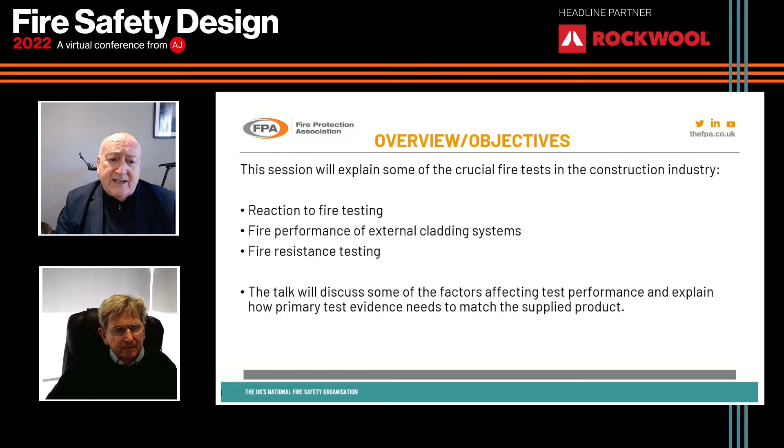Just harking back to the first presentation this morning from Colin from the HSE, as a way of introduction: he noted that the new gateway process shows that the designer should ensure compliance for fire safety and provide the supporting evidence. That's really, really challenging. John and I are going to show you why that's challenging, and perhaps some ways that you can help yourselves through that process.

So, jumping straight into reaction to fire testing, there are a couple of aspects to this. One is inside a building, and how we would classify the inside of a building, and then John will come on to the external cladding shortly.

It's a really technical subject. It's only small scale testing generally, probably no more than 2 meters high when we're looking at the inside of buildings. In this case, for reaction to fire, we're looking at the combustibility and ignitability of a single material. It interacts with the substrate that it's on.

The color of it can influence its performance, and many other factors can influence the performance. The way I look at reaction to fire testing within a building is a small waste paper basket in the corner of the room catching fire, and what happens to the linings of that building. We'll come back to that analogy later on.

But do the walls propagate the fire and spread it up and along their surfaces? Does the ceiling do the same? Does the floor do the same? There's a number of test methods used to get to a classification, and it's that classification which is used in Approved Document B, which you'd look at depending on where you use it in a building, and what type of building it is.

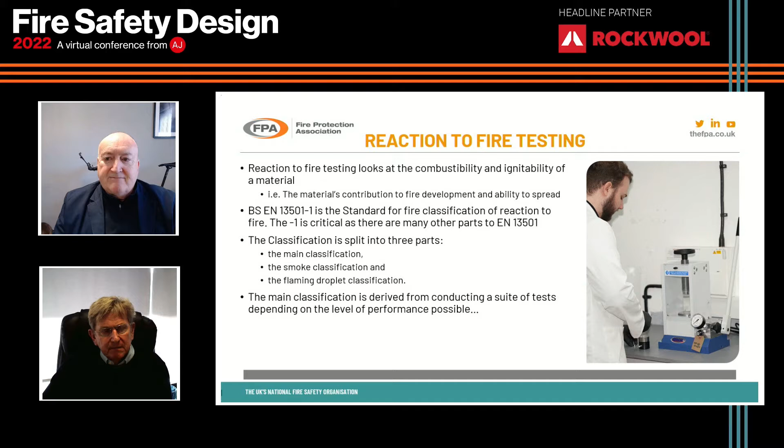I'm going to hand over to John in a second, who will take us through the outside of building, and obviously part of the reason we're all here today talking about fire safety was because we got it wrong in some of the recent exterior aspects of buildings.

John. Okay, and thanks for that, Chris, and thanks, Paul, for the introduction. As far as the fire performance of external cladding systems, what's the interest?

Well, quite clearly, the fire in June 2017 woke the world up to the fact that the fire performance of external cladding systems was important. For those of you who don't know, the Fire Protection Association's history is very much associated with the British insurance industry. They were our founders, and they still play a major part on our board.

In fact, immediately after the Grenfell fire, insurers asked us for our advice about where they should go with external cladding. Clearly, the view we all had immediately post-Grenfell was the systems had to comply with certain regulations, and so the expectation was that a large-scale test would have been performed, an 8414 test on that system, and the system would have passed to allow it to be put on that building.

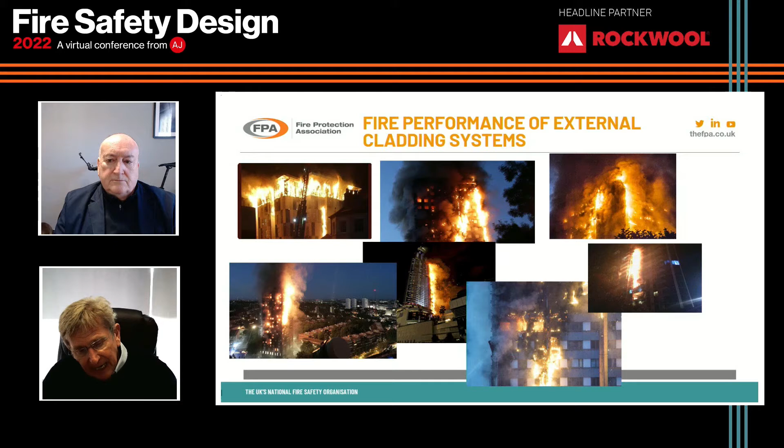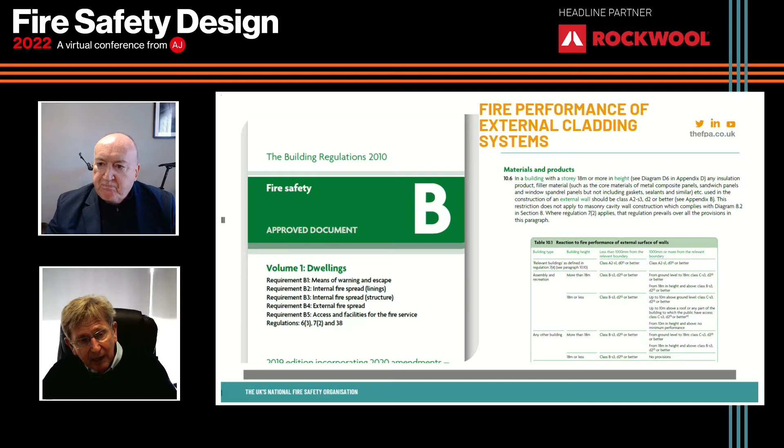For many years, many of you will be aware that the insurance industry has put its own rules and regulations in as far as sprinkler systems and other fire protection systems. It's not been quite so tough on the fire resistance requirements of buildings, because it's really looked for building regulations to do that. I think Grenfell highlighted another issue, and the insurance industry then began to look a lot more closely at external systems and see whether the current testing system was fit for purpose.

We knew that there would be a review of the 8414 system, and so FPA was actually commissioned by the ABI to look at the standard itself. We looked at several different aspects. We looked at the fuel loads, because in work that we'd done, particularly on curtain wall systems, we'd found that some of the fuel loads used in testing didn't really take account of a modern lifestyle.

There was an awful lot of plastic involved in the fuel load of modern buildings, whereas most of the cribs used for reaction to fire resistance testing are wood. Actually, when we did the two comparative tests with an open burn, including some plastic, and looked at the full wood crib, we found the full wood crib was a pretty good test for 8414. So we parked that and said, yeah, we think that's generally okay.

More worrying for us was the breaching of the cladding system by unstopped vents and ducts. Very early on in the Grenfell investigation, it became quite clear that toxicity issues were a problem for the residents caught in that tower block, and the 8414 test has no requirement there. Our work confirmed that needed more looking at.

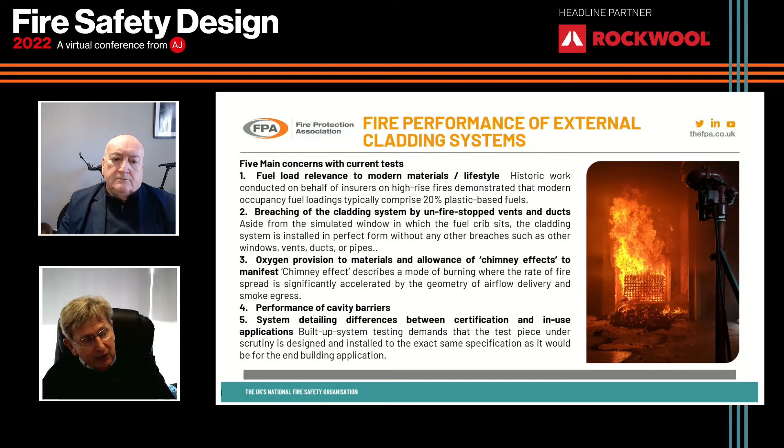We released that report, it went into BSI. There was a review of 8414, and some changes were made, but certainly not enough. And the important thing to stress here is that insurers are not convinced any longer that the 8414 test, even the modified 8414 test, is enough of an indicator to give them any satisfaction that there is the level of non-combustibility or fire resistance that they require in the external system.

So in the new year, we're likely to see an 8414 plus—I'm calling it 8414 plus, it will almost certainly have a different name—but it will be a stiffer test. And for those of you who remember FPA's origins being back at the FOC, you'll know that the loss prevention standards, insurance standards, have always been there to look at property protection as well as life safety.

I think what we'd like to see within that new standard is some open state cavity barrier test done before the 8414 test. We are likely to have fixed cavity barrier positioning. There's a material identification test, which we've actually now been doing at the FPA for about 6 or 7 months, so we can give a chemical fingerprint of all of the insulation materials used in the test sample, so we can give some reassurance to property owners and specifiers that the stuff we tested is the same stuff they're putting on the sides of buildings.

We're looking at the measurement of field of debris, because that's clearly important, particularly for firefighting and evacuation purposes. We're looking, as I said, at the introduction of penetrations such as extract ducts. And again, I touched on the measurement of toxicity. But most importantly, we're looking at the certification of manufacturers and installers.

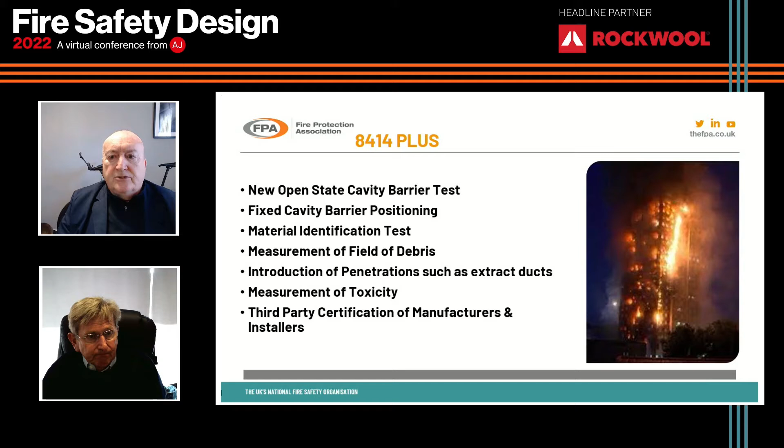Chris. Thanks, John. So I'll elaborate shortly on the testing versus certification aspect.

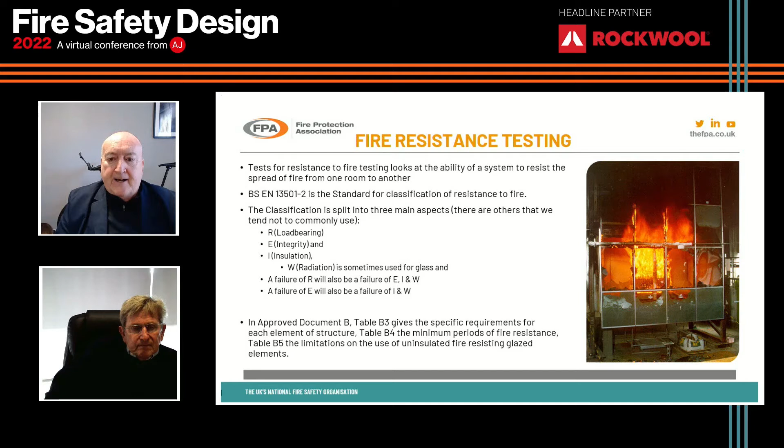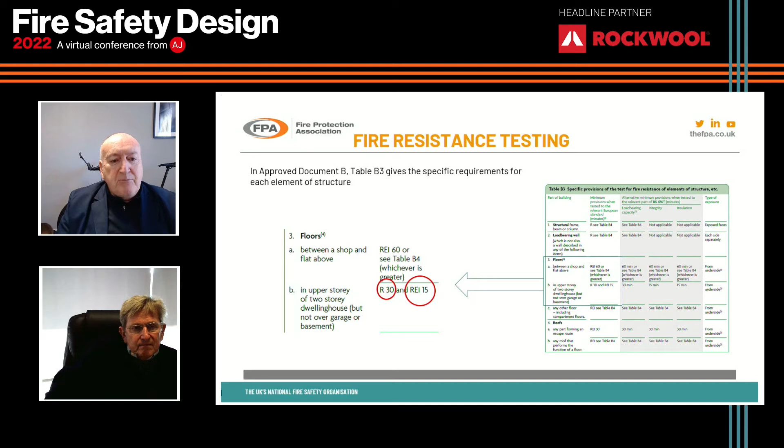It's on there, as you can see. I'm rattling through these, but taking a few specifics from Approved Document B, you'll see where it references those classes. Just one letter either way, omitting the R, omitting the E, can be significant and can give us a completely different type of product.

Similarly with that, I'll skip over the next one. I just wanted to touch on, because Paul mentioned it before about certification, there's a whole series of factors here which cause issues about the test data. When we get supplied test data, how do we know it's valid? Is it right that's relevant, the data that was tested 10 years ago for the product that's actually coming to site now, who's going to install it, etc.?

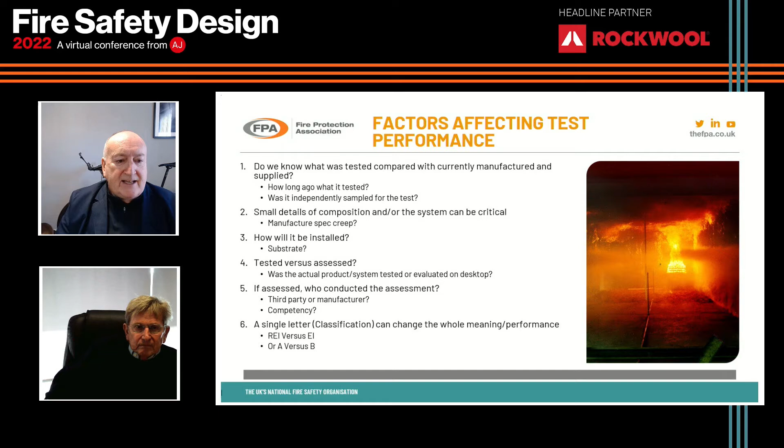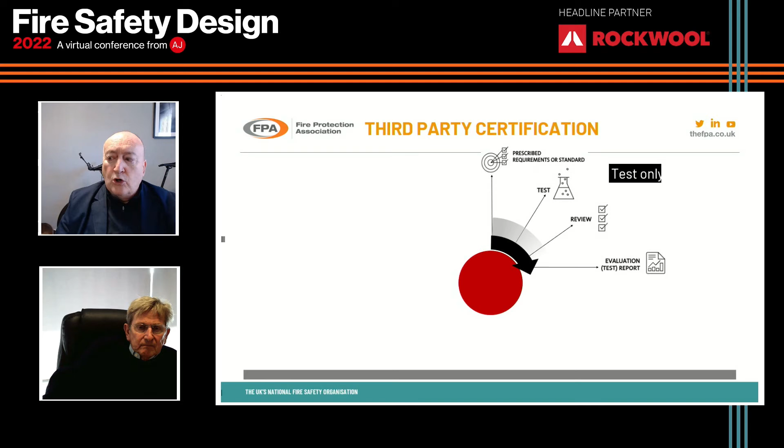Actually, the answer to that is in product or installer certification. Those bodies are evaluated independently rather than just relying on a test to prove the performance. There's a whole series of other aspects that get caught up in certification, such as factory visits, ongoing testing, and independent reviews of the data.

So we're often asked lately, especially post Grenfell, can somebody do a test on this product? Actually, that means very little. It means that specific product at that specific time will work. It doesn't mean on an ongoing basis it will work.

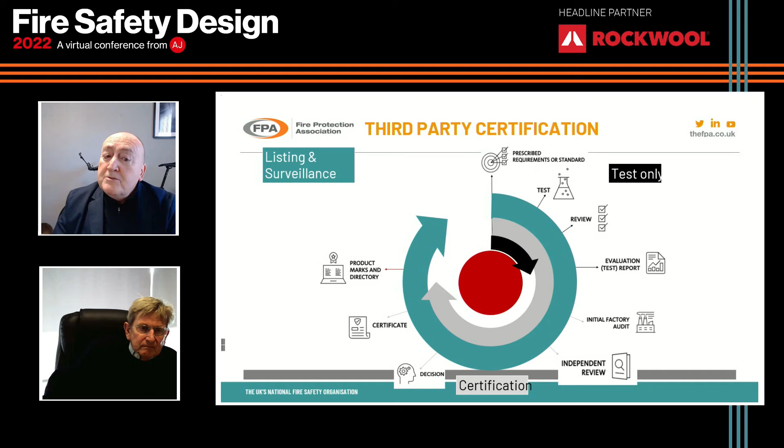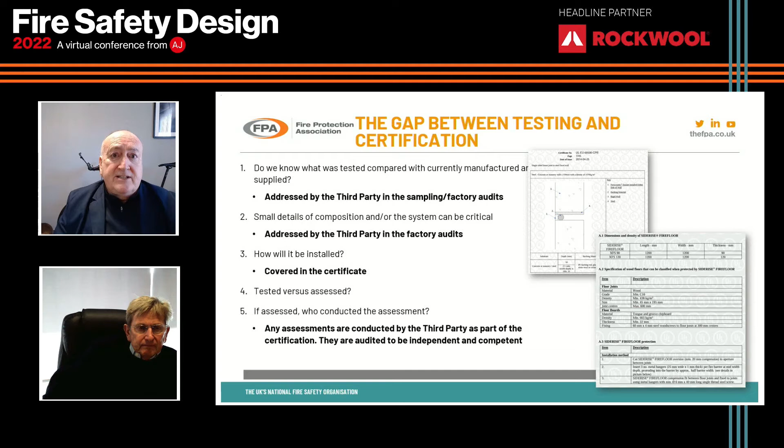So actually the answer to many of these questions, the ones I just raised in the prior slide, are all covered by certification of the product or by the installer. I think it's really important that a lot of the needs for you to prove compliance are actually taken care of by using certification of the product or certification of the installer.

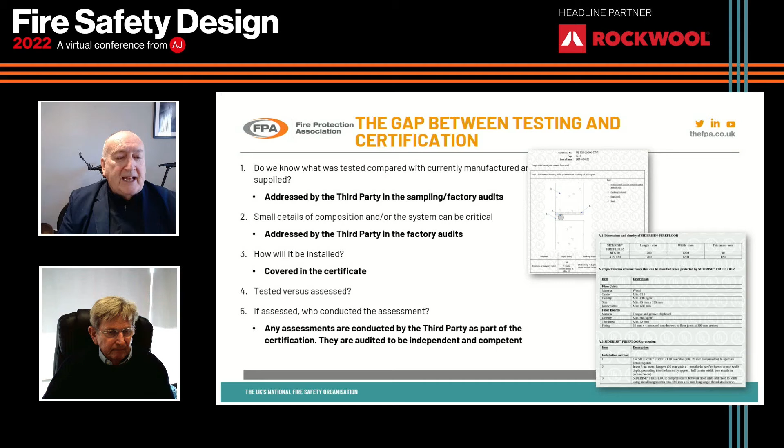It's actually passing on the responsibility from you to somebody else to say, you've done your bit. I've asked for tested, certificated products. I've asked for certificated installers. My responsibility is done. It's now down to somebody else to prove that they can satisfy those needs.

Gosh, and breathe. Okay.

Good. Well, we've got a good range of questions rolling in here, but can we get to the bottom of one thing? Because architects and others who specify, we're not lawyers.

And when you look at the way in which, say, a standard BBA certificate may be laid out, the information can be substantial within that document. It can be 8 or 10 pages long, and some of the information may even be conflicting because it's summarized at the front and then given in more detail later on within the document.

The first point I'd ask is that if anybody is specifying a product, let's say it's a roofing felt, move away from fire. You know, roofing felt can catch fire, but I'm talking about its performance as a roofing felt to keep the weather out.

Anybody using a BBA certificate should presumably, you would say, read it entirely front to back, as opposed to just the front page. That's a yes/no question, I think. Then it's a yes answer. Okay. Now, if they're doing that, that document should surely be, and I'm making a plea on behalf of those of us that have to read them, in clear language. That is absolutely essential, isn't it?